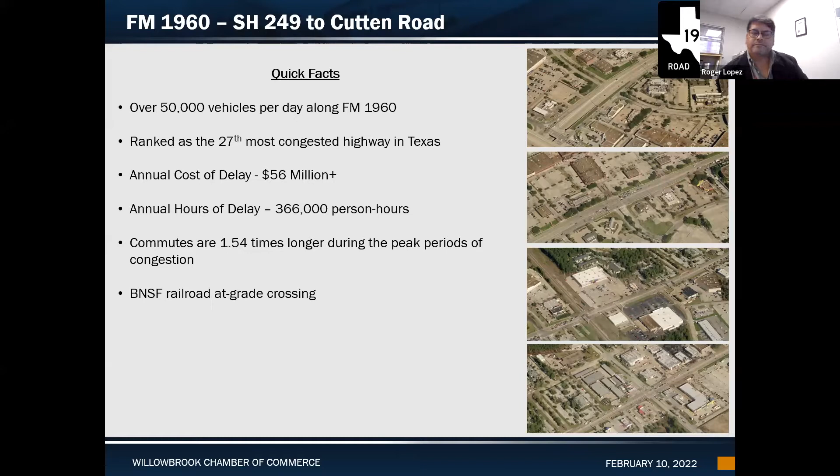The limits for this project: for FM 1960, the limits are from SH 249 to Cutten Road. To be more exact, it's a 0.8-mile project. It starts right east of Centerfield Drive, to a little bit east of Cutten Road.

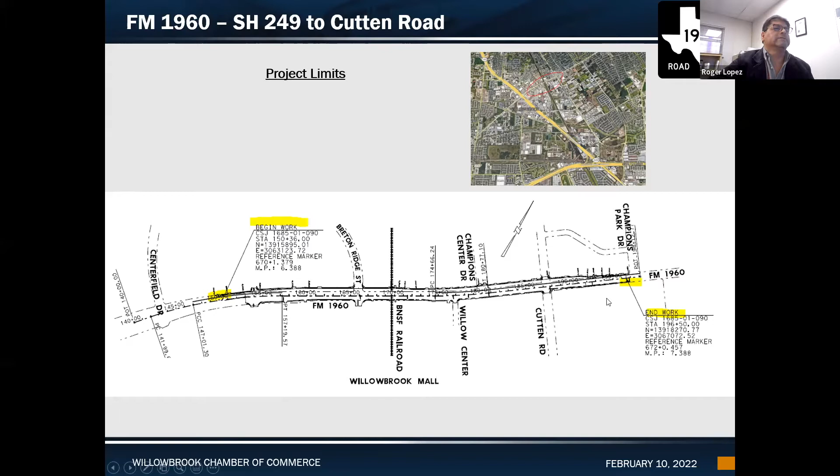The scope of work: the project will reconstruct FM 1960 from SH 249 to Cutten Road to an 8-lane divided curbed and guttered roadway with raised median and left turn lanes. Reconstruction will include new concrete pavement. The project will also install a new storm sewer system that is going to improve the drainage in this area. Also, we're going to install concrete sidewalks and railroad crossing improvements. All these changes are going to help the mobility along the corridor.

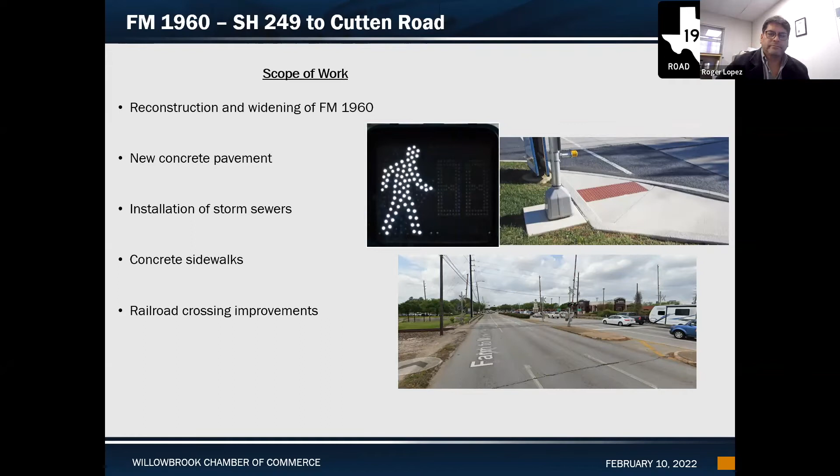Some background about this project. It started in 2005 as a safety project to remove the at-grade railroad crossing along FM 1960. TxDOT partnered at that time with the Houston Northwest Chamber of Commerce to build a stakeholder working group. There were multiple alternatives based on the stakeholder engagement. One of them was the construction of a bridge over the railroad. Another option was to build a bridge with existing service roads at grade.

The current status for this project: the project is environmentally clear. The right-of-way acquisition is still ongoing. The utility relocation is ongoing too. There are some delays, but it's out of TxDOT's control. The letting date for this project is June 2022. We may be forced to change the letting date due to utility relocations, but probably in March or April we are going to have more updates about the new date.

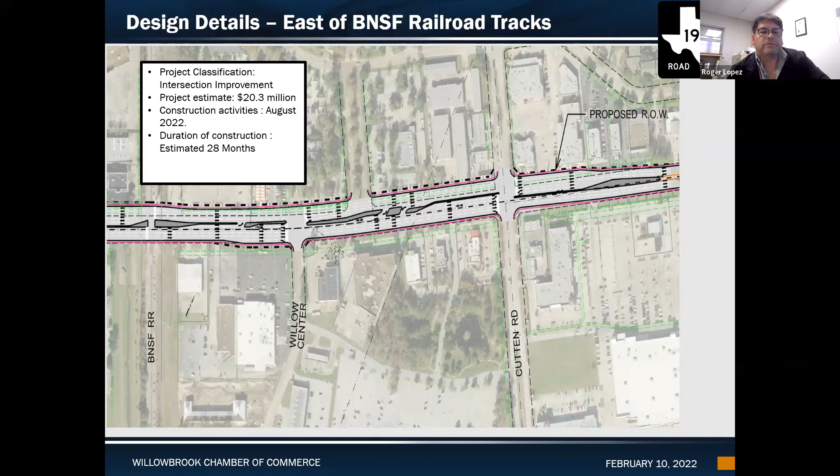Also, the project is classified as an intersection improvement. The total estimate for this project is $20.3 million. 80% is funded by federal money and 20% is local. The construction activities are going to start in August 2022 if the letting date is still in June. And the total construction is estimated at 28 months.

This slide is showing the existing condition of the FM 1960 roadway. Right now, some areas already have 4 lanes in each direction. We have an existing raised median, but that's going to be replaced to allow for left turn lanes. Also, we're going to be replacing all the existing pavement, which is almost reaching its life span.

The proposed condition is going to be shown in the next slide. It's pretty much like I was saying: 11-inch thickness CRCP, reinforced concrete, raised median with left turn lanes, sidewalks. Also, we are going to be replacing the mast at the intersections for the traffic mast and drainage.

The TCP for this project during construction, we are trying to keep all the 3 lanes in service as much as possible. Of course, we are going to have some daily lane closures. And for these daily lane closures, probably we are going to release the information in advance. If you have any questions about lane closures during construction, you can contact the TxDOT Public Information Officer, in this case, Danny Perez.

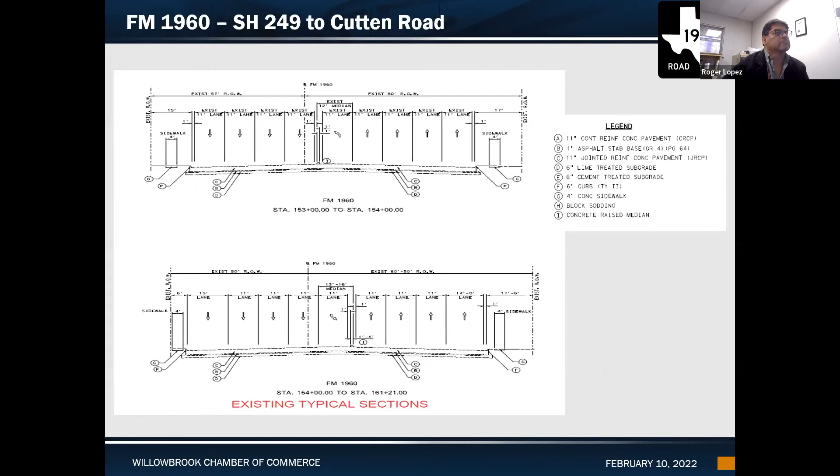Okay, next question. In the design, are there going to be right-hand turn lanes? And if so, can you be specific? Can you provide a little detail on which intersections will have turning lanes? We can provide. Roger, you can go to the slide. No, that's the existing. This is the only proposed slide I have so far.

Right here, we're providing right turn lanes. It just depends on the specific location. At this moment, I cannot provide at what intersection we are going to be adding the right turn lanes. But probably later we are going to be able to, once the set of plans are complete. Okay. And if somebody wants to look at the final schematic, we can certainly provide that. That's something we can send out. It's not a problem.

Next question. Will the west side of 249 be expanded as well, or will it remain a total of 4 lanes? I believe that's the project that was mentioned before, from 249 to Eldridge. Is that correct, Danny? Yes. We can certainly circle back on that and find out. We'll have to get with some of our folks. We have a team of folks that handle future projects, so we can get you an answer on that. It's not a problem. Again, you have my email, so feel free to reach out with a specific question, and we'll definitely answer that.

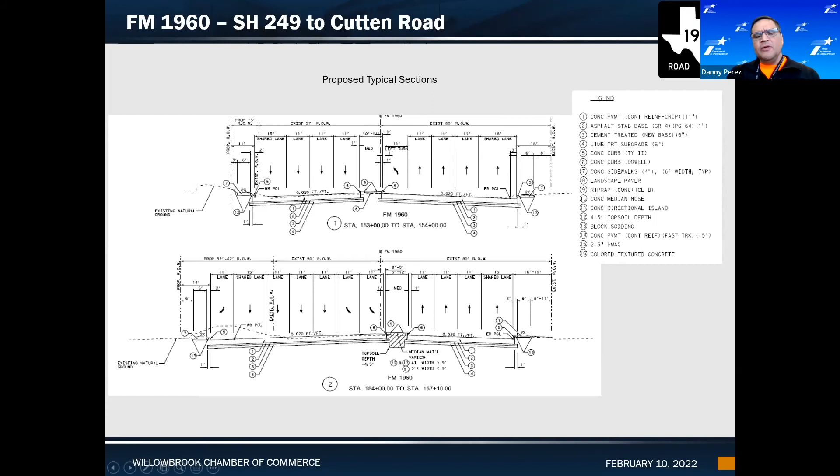And we can also include in the future, if we need to have officers, those kinds of things that can help with the flow of traffic, like working what they call the pigtails. Those are devices that the officers can use to change signals. So if we have a situation that arises, and I know we've done that on many of our projects, we can certainly use that as an option. So there's different tools in the toolbox that we can use to keep traffic flowing if there's an issue.

Okay, that seems like that's all our questions. Oh, we got one more, just came in. Which department handles the City of Houston lights? The lights at JFK and Beltway near Bush Airport need adjusting. Miss Davis, if you don't mind, send me that in an email. I have to look at my list because of that area. I'm not sure if it's inside the City of Houston or not. If it's inside the City of Houston, it's definitely the City of Houston. But send me that email and I can look into that for you.

And then if it's ours, we can ask our traffic engineering signal folks to look at that and make some adjustments. And what particularly is the issue? If there's a specific concern, if it's too much green or too much red, let us know, and we can look at the timing. We do have folks that go out on a regular basis to check that, but send that to me and I can find out first and foremost if it's city or if it's ours. And then if it is city, we can go with the city folks that we work with and ask them to look at that for you rather than having you call 311.

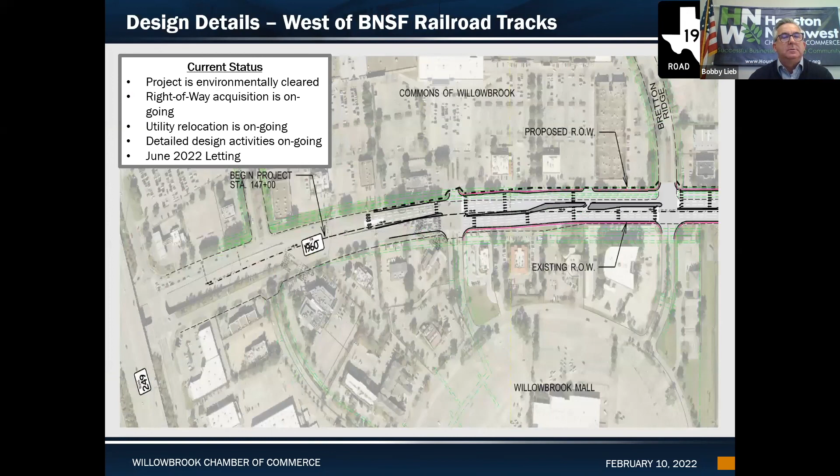All right, here's another question about the railroad tracks. I think you answered this, that it has hydrology issues, but is there any way the traffic can flow under the ground from the railroad track? I think they're referring to this drawing here. Well, we have some projects where it's really hard. Probably it's going to take a minimum of 25 feet below the railroad, so it's going to be very complicated to do that.

We need a 25 or 26 feet clearance, particularly with a railroad bridge in this case. So we are talking about depressing the area from half a mile east to half a mile west. So it's complicated, to be honest. But it's something we could always look at in a future project.

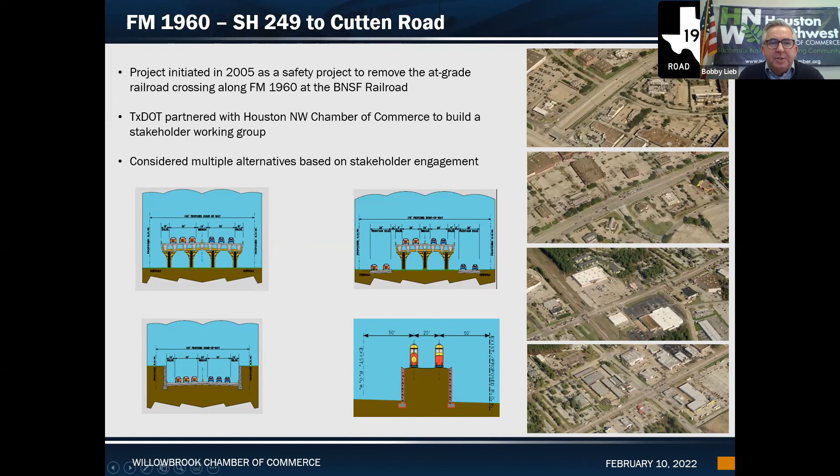All right, that seems to be all our questions. Gentlemen, thank you very much for your time. I appreciate it. We will be back in touch. And yes, Danny, as information and specifics about the project come in, please push those forward to us. Sure. And we will use our channels to make that information as accessible as possible. Yeah, and Bobby, I'll send you the presentation so you can share it with the chamber members. Okay, we will.